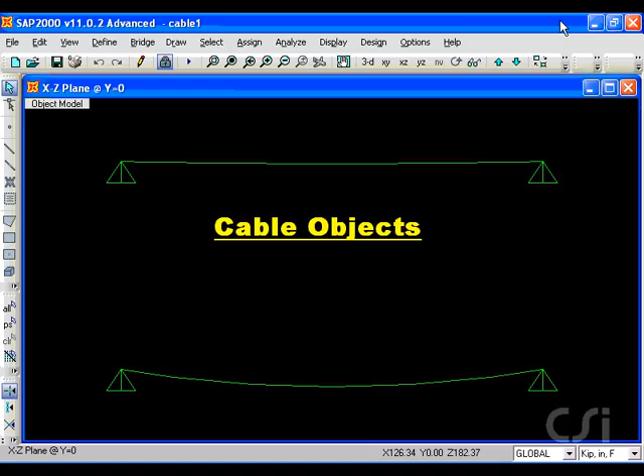This tutorial will provide an overview of some of the properties associated with the cable object. The cable object is a catenary element with two primary characteristics. 1. All external loads must be resolved into axial forces. The element has axial stiffness only and no bending stiffness. And 2. It is highly nonlinear. Forces in the element are dependent upon its shape.

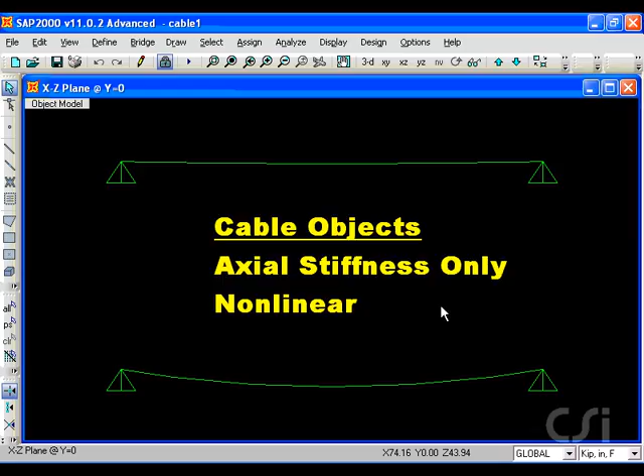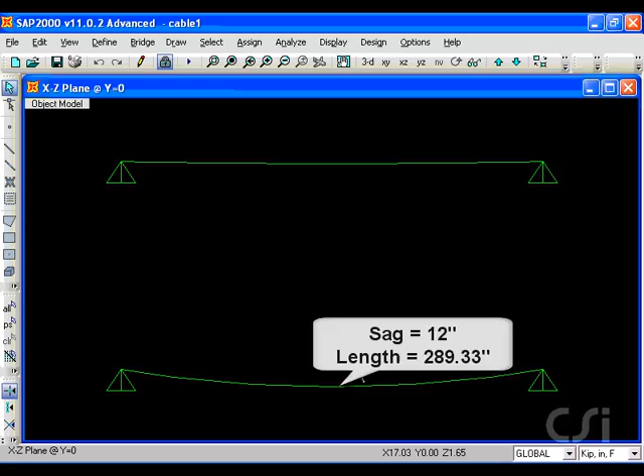To illustrate these two traits, we have created two cable objects. Each cable spans a distance of 288 inches. The top cable has a sag of 2 inches and a total undeformed length of 288.02 inches, while the bottom cable has a sag of 12 inches and an undeformed length of 289.33 inches. Although there is a relatively small difference in the undeformed lengths, there is a significant difference in the axial forces in the cables.

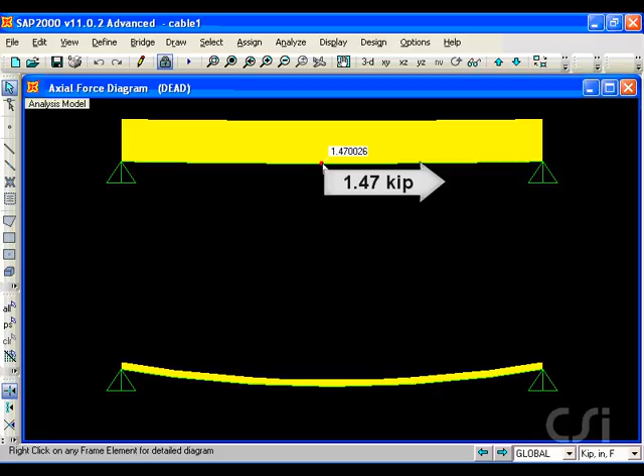When subjected to self-weight, the cable in the top has an axial force of 1.47 kips, while the bottom cable has only 0.25 kips. In this case, the closer the cable is to horizontal, the larger the axial force must be to support the vertical weight.

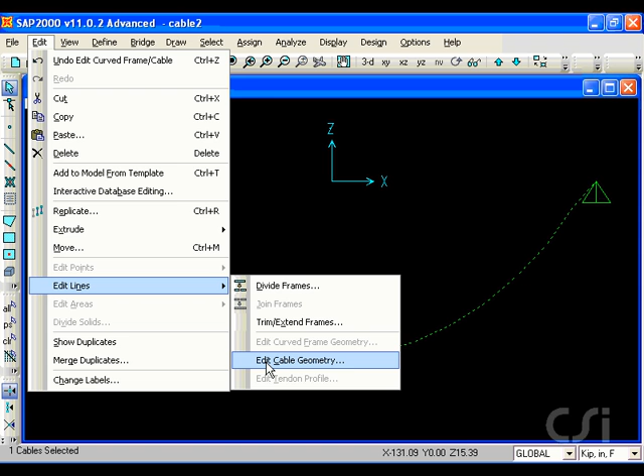As just stated, cable shape has an enormous impact on cable forces, so it is important to accurately determine the drape. SAP2000 offers a powerful tool for the determination of cable shape. Selecting the cable, and then going to the Edit Lines, Edit Cable Geometry command brings up the cable geometry form. The cable geometry is generated from the cable type.

The first choice is a shape that gives minimum tension. For a 1-inch diameter cable spanning 288 inches, this tension is 0.06 kips at the ends. The sag for this cable is 97.2 inches in the deformed state. This includes strain deformation, and virtually an identical sag in the undeformed state with no load. The program also tells us the relative lengths for the two states in comparison to the chord length of 288 inches. The program uses this information to generate point coordinates for 17 points along the cable to define the shape.

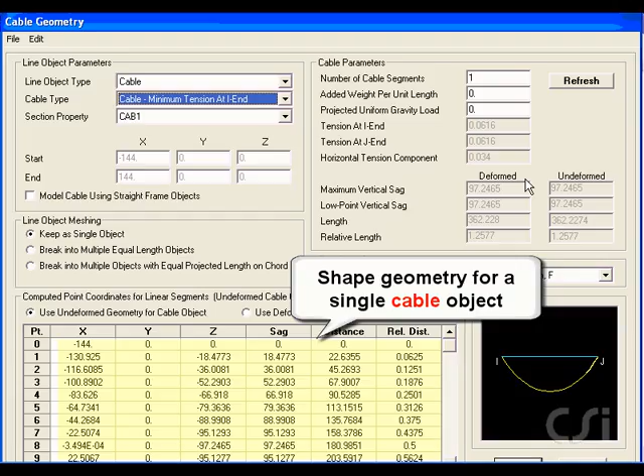This geometry defines a single element. Multiple elements are not being generated. As a general rule, a single cable element is adequate to model each cable unless you wish to add concentrated loads or discretize mass along the cable for dynamics. The number of cable segments may be changed here.

The next option allows for a shape based on a minimum tension at the other end. We can also specify the tension at the I-end. We will input 0.1 kips. This changes the sag to 32.99 inches. Again, we can do the same thing at the other end if desired.

The next option allows us to generate the shape by specifying the amount of horizontal tension. Here we input 0.05 kips. This amount is the horizontal component and results in a sag of 62.14 inches.

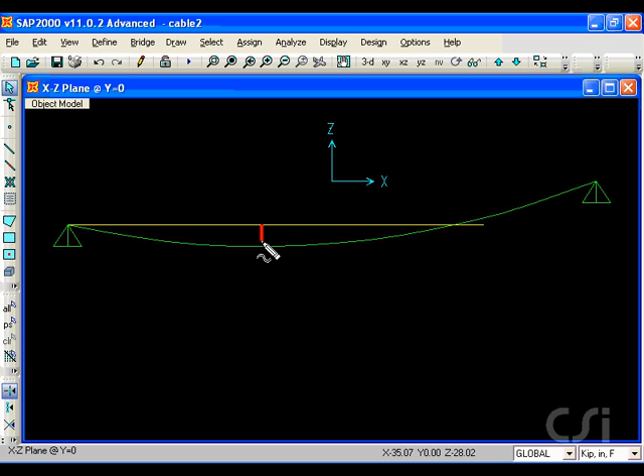The next shape generation option is to create a shape based on the undeformed length. If we specify an undeformed length of 288 inches, the sag in the deformed state drops to 1.47 inches and the tension force goes up to 2 kips.

The last option available to specify cable shape is to input the relative undeformed length. A ratio of 1 indicates that the undeformed cable has the same length as the chord. Here we will increase the relative length very slightly to 1.001, but notice how significantly the tension force drops and the sag increases. This shows how critical determining the correct shape is to the accuracy of the overall model.

And just to reiterate, the only purpose of this form is to find the starting shape of the cable as shown in the coordinates table. It does not determine what forces will be in the cable.

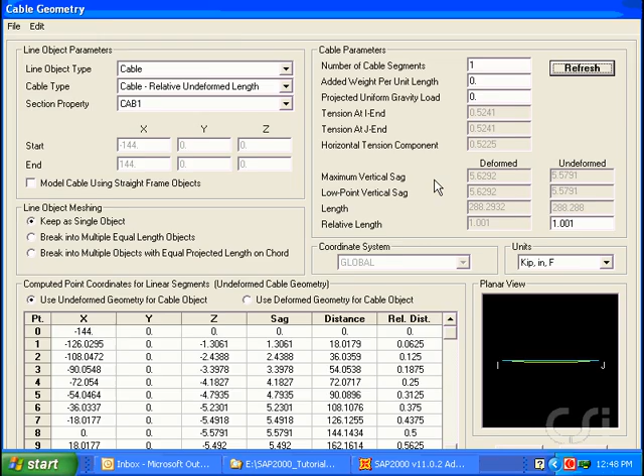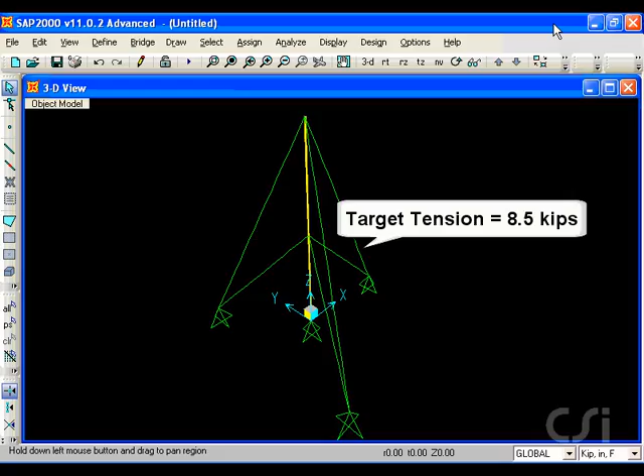Now we will create a model using cable objects. It will be a guyed tower 200 feet tall. The single mast tower is comprised of an 18-inch diameter pipe pinned at the base and guyed with 3 cables at the midspan and at the top. The guys will have an area of 0.34 square inches with an initial target tension of 8.5 kips.

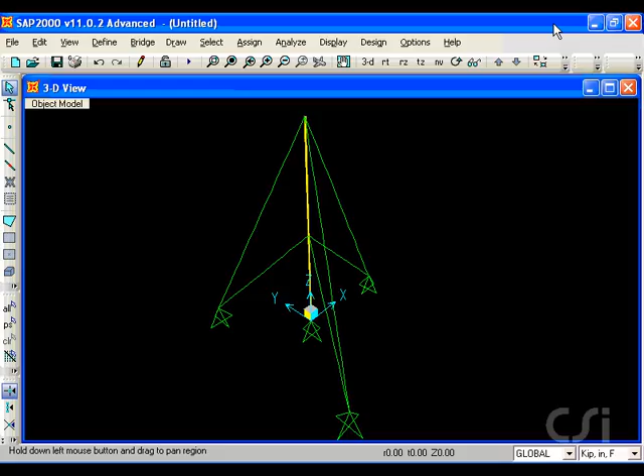The tower will be subjected to dead load and a wind load of 120 pounds per linear foot. The analysis will be nonlinear, as models utilizing cables always require a nonlinear analysis, and thus the advanced version. We start by defining a grid that is 100 feet wide by 200 feet tall.

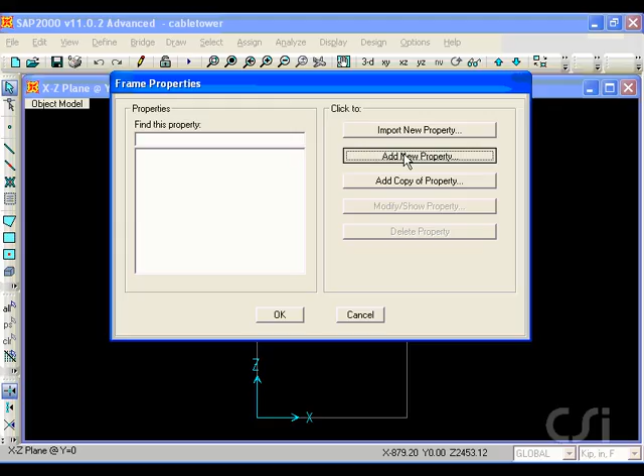Switching to inch units, we will define the tower mast. Using the Define Frame Sections command, we will add a new pipe property called mast. The outside diameter will be set to 18 inches with a wall thickness of 1/2 inch.

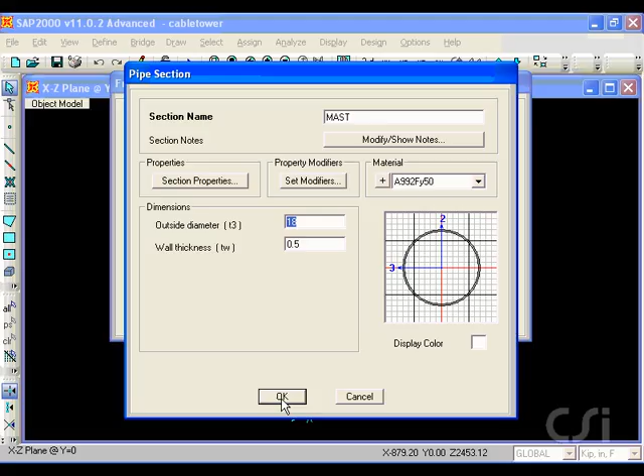Next, we will define the cable sections. We will call it cable, with an area of 0.34 square inches.

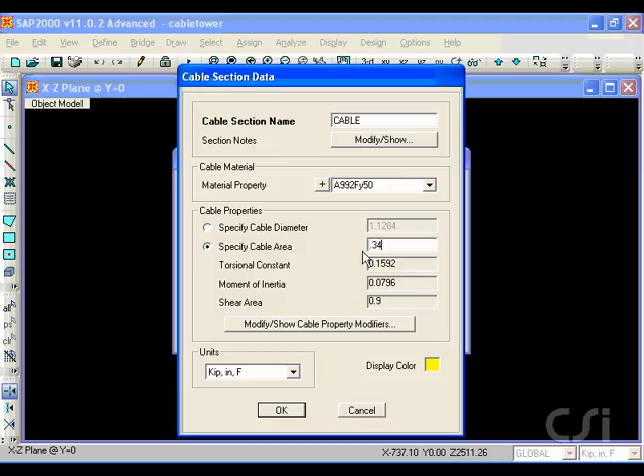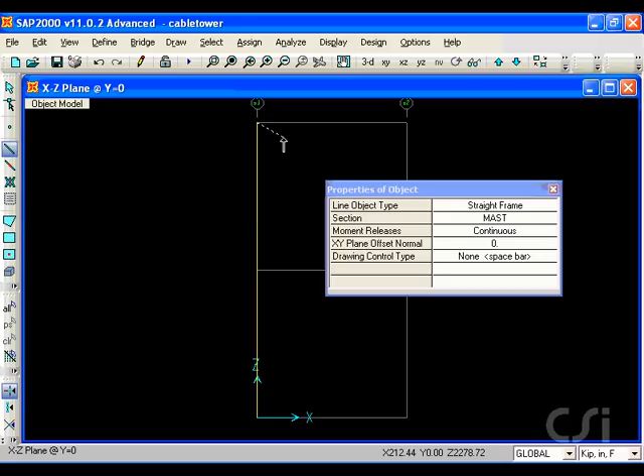Next, we draw the mast from bottom to top. The pin support will be added to the base.

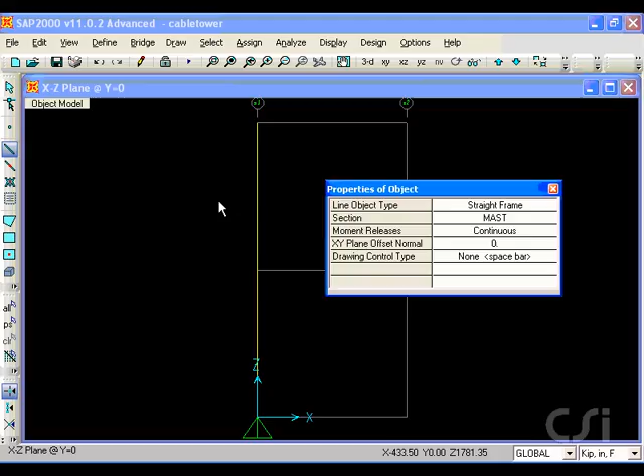We will now add one set of cables in the XZ plane. We draw them so that the I-end is at the ground. This opens the cable geometry form, where we will select a cable type of tension at I-end, as we will use our target tension of 8.5 kips to determine the shape.

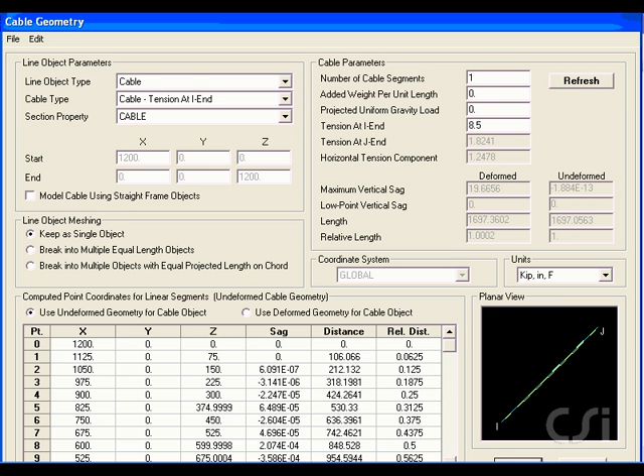Repeat this step for the upper cable. Note that the deformed sag is approximately 10 inches, while the relative length for the undeformed case is less than 1.

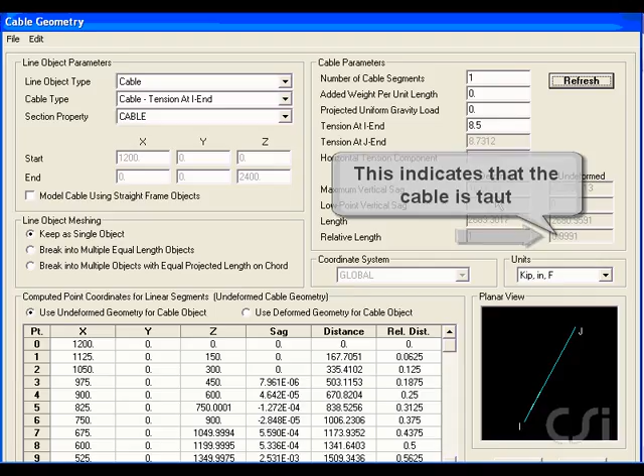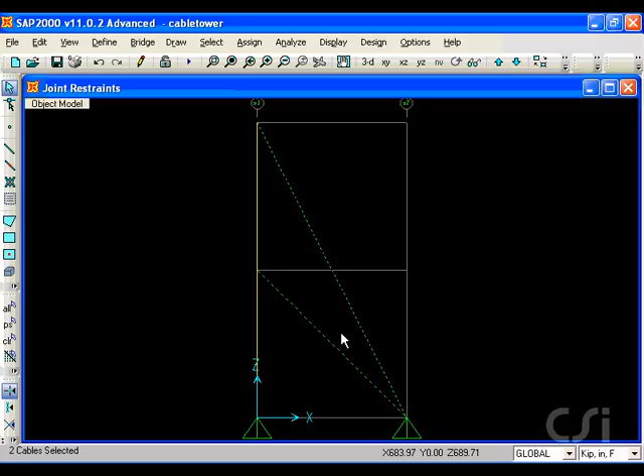Next, we apply the pinned restraint to the base of the cables. We will replicate the cables and support just drawn at 2 other locations in the model. We will do a radial replication about the Z-axis, placing the cables 120 degrees apart.

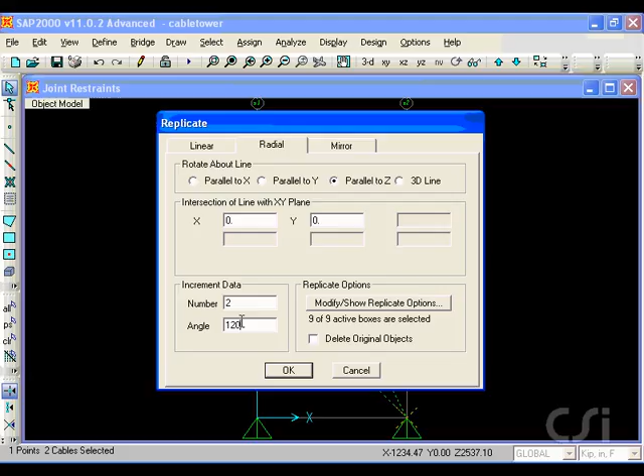Now we define our load cases. We will have a dead load case with self-weight, a target case for the application of the target force in the cables, and a wind load case. We will not use the automated lateral load option, as we will apply the wind load directly.

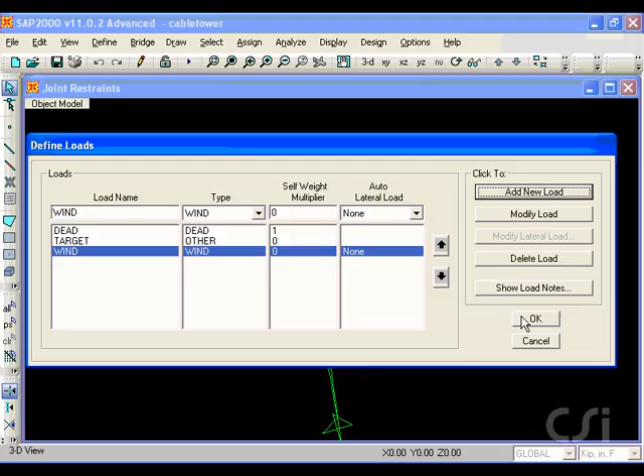Next, we select all the cable objects and go to the Assign Cable Loads command. Here we select the target force option, although we could have also used strain or deformation to tension the cables. We will use a target force of 8.5 kips applied at the ground location to be applied in the target case.

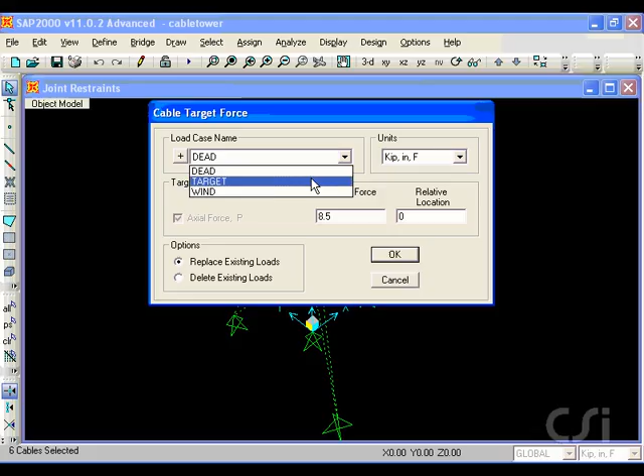Next, we apply the wind load to the mast using the Frame Loads command. The load goes in the wind case, and we will use pound-feet units. The load will be applied in the Y direction with a magnitude of minus 120 pounds per linear foot.

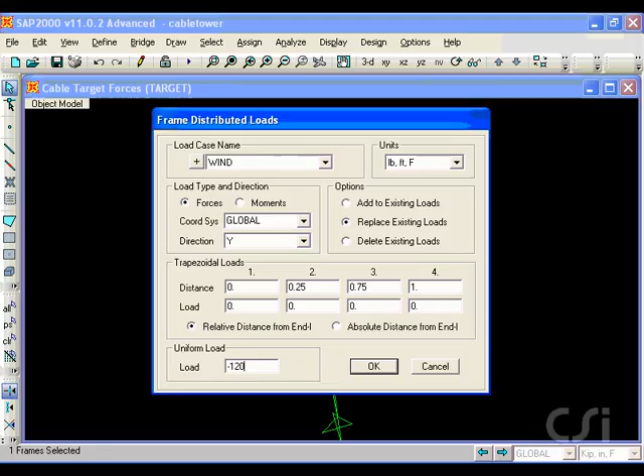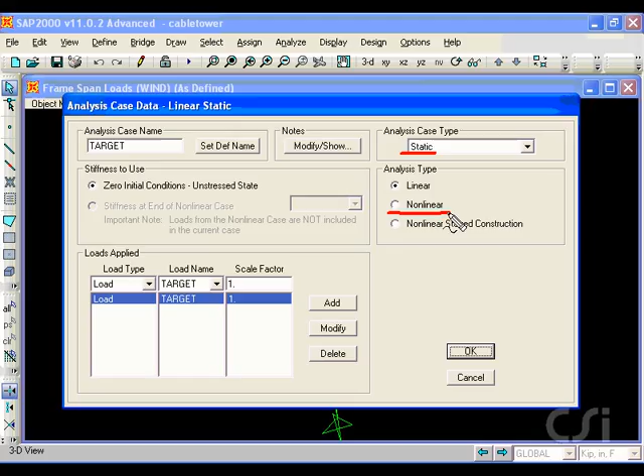The last thing we need to do prior to running the analysis is to define our analysis cases. The program has automatically created 3 cases based on our defined load cases: target, wind, and dead. However, we will need to modify these to obtain the correct model behavior. For the target case, static analysis is okay, but it must be nonlinear since cables are included.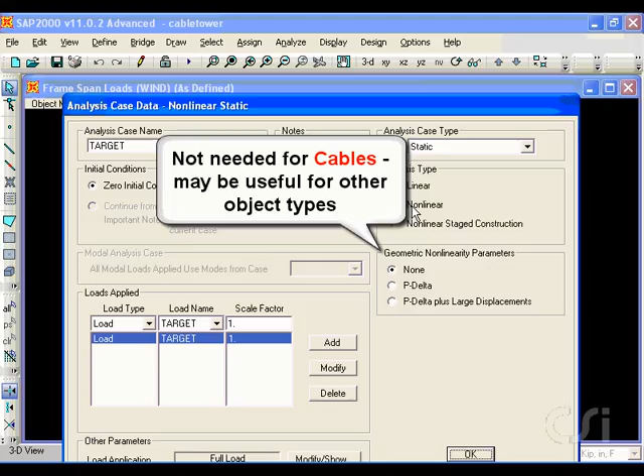The formulation of the cable object includes nonlinear geometric effects, which means that we do not need to perform a large displacement analysis to get the correct behavior for the cables. However, you may wish to consider P-delta for the other objects in your model, such as the mast in this case. In addition to our target cable tensions, we also want to include the dead loads in the analysis.

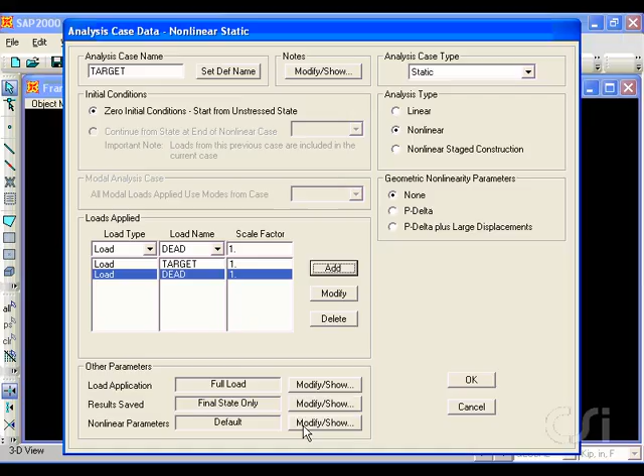A check of the nonlinear parameters shows that we can set the target force iterations, as well as the convergence tolerance and the acceleration factor, but we will leave all of them set at their default values for this analysis.

Next, we will modify the wind analysis case. Again, we will set it to be a nonlinear analysis type. However, in this case, rather than starting from 0 initial conditions, we will start from the end of the target nonlinear case. This will cause the cables and model to be in the correct state when the wind load is applied.

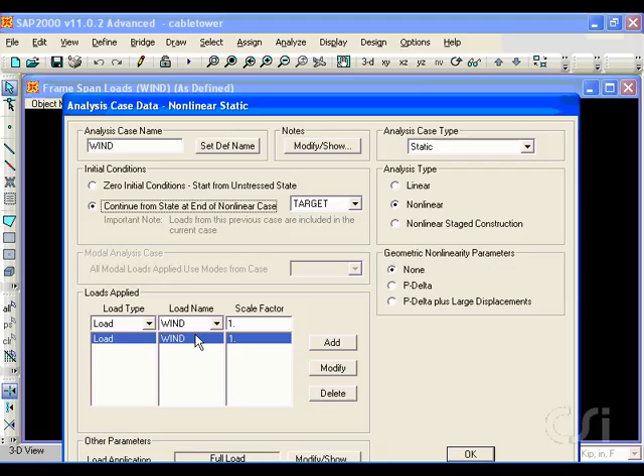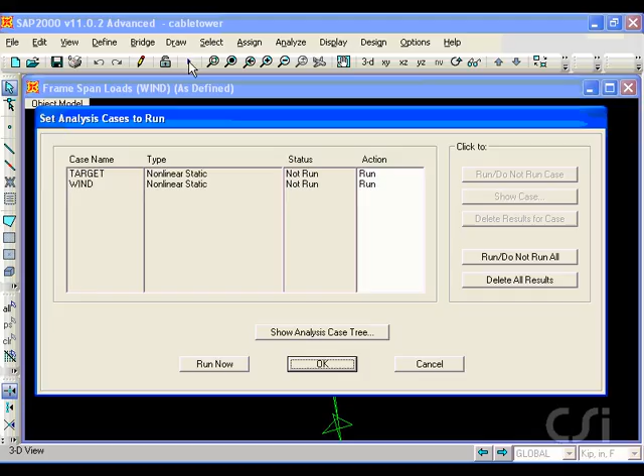We can delete the dead analysis case as these loads are included in the target case. We are now ready to run the analysis. Note that our two nonlinear static analysis cases are set to run. After the analysis, the deformed shape for the target analysis case is displayed. We will ask to see the axial forces for this case.

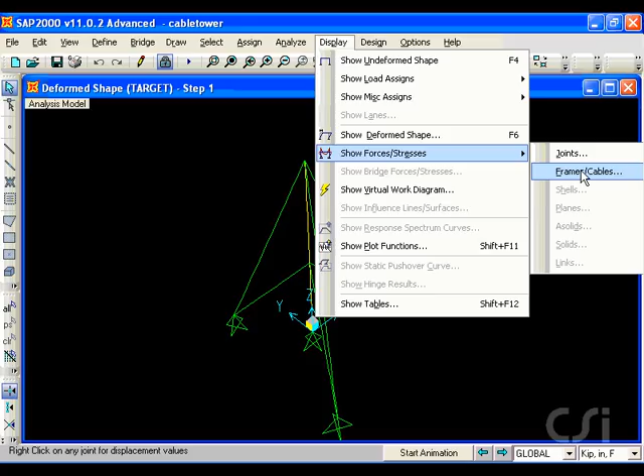A right click on a cable brings up the force diagrams, and we see that the force in the cable is 8.478 kips versus a target of 8.5, which is very good. Right-clicking on all 5 other cables shows similar good results.

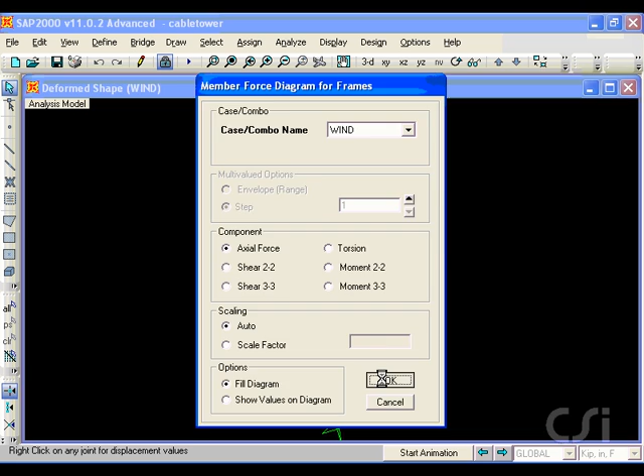Next, we will display the axial forces due to the wind analysis case. For the first cable, which is perpendicular to the wind load, the axial force is 8.7 kips, not too different from the target. However, for the cable that is only 30 degrees off from the direction of the load, the tension shoots up to 14.6 kips, while the cable that is on the leeward side slacks off to only 2.7 kips.

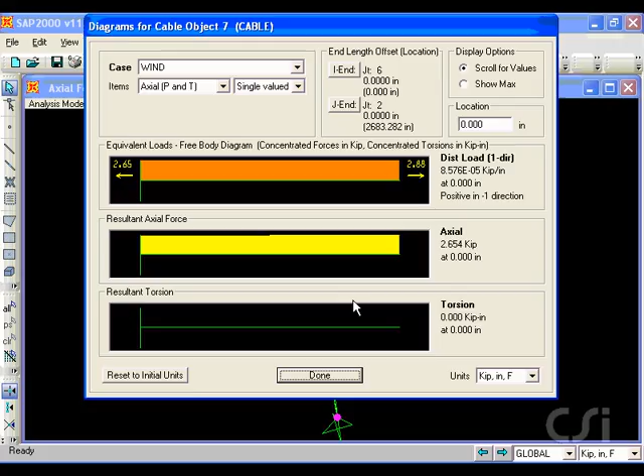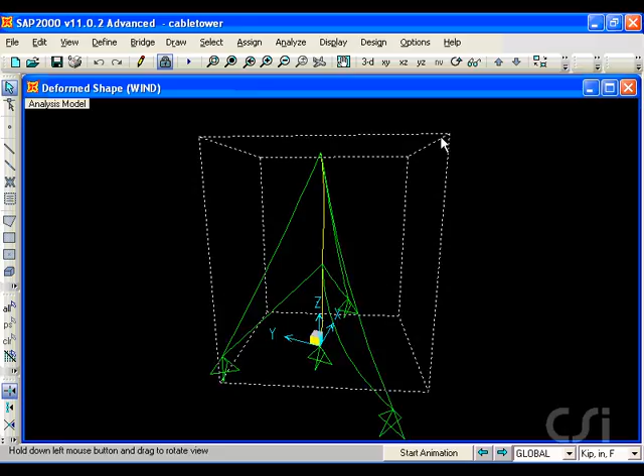Next, we will show the deformed shape for the wind analysis case. We will increase the scaling to make it easier to see the cable shapes. If we rotate the 3D view, we can see how the cables on the leeward side sag more, while those on the windward side remain taut. Animating the structure gives us an even better idea of the cable behavior.

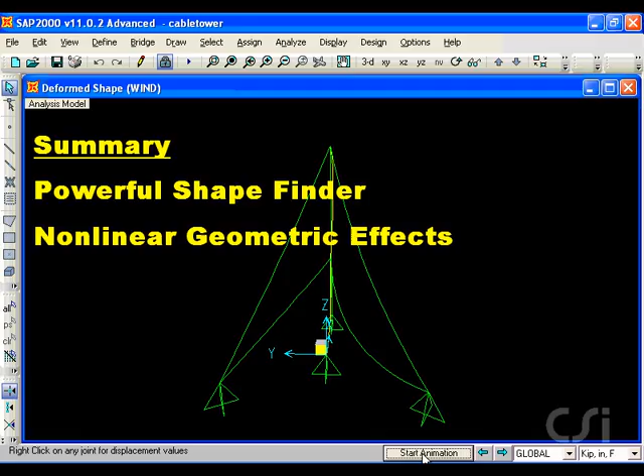In summary, SAP2000 provides an elegant tool for the modeling of cable structures, offering a powerful shape finder with many options for generating geometric coordinates, as well as an element that inherently incorporates geometric nonlinear effects. This concludes this tutorial.